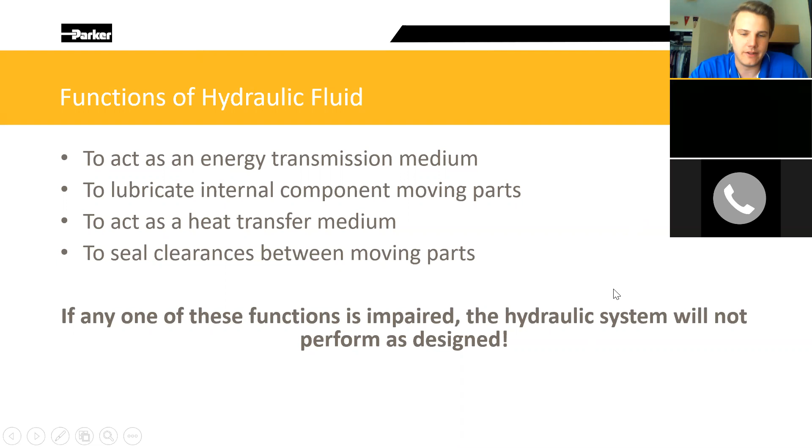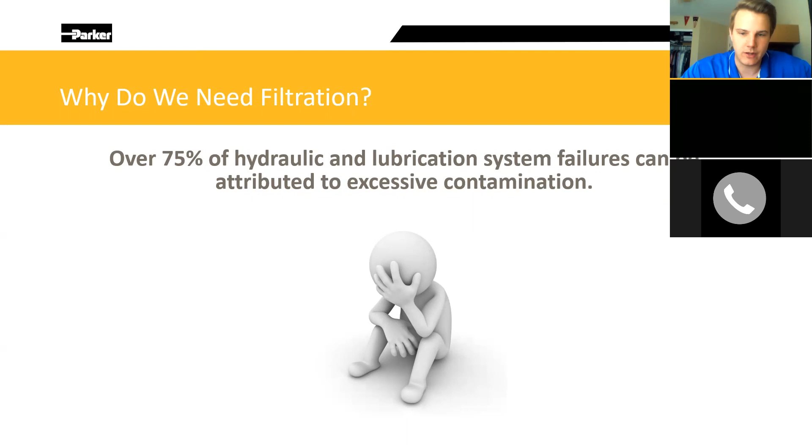So one of the main ways that these functions can be impaired is through contamination. Over 75% of hydraulic and lube system failures can be attributed to excessive contamination. That's over 3 out of every 4 problems you see with a hydraulic system that can be attributed to just contamination in the system. It doesn't have anything to do with the design of the system or the application it's being used for. It could be designed perfectly, but if you get contamination into the system, you're going to see failures and problems, and really have to deal with those headaches and issues.

So there are 3 main types of contamination you can get in a hydraulic system: the first being particulate, the second being water, and the third being air. Particulate is the most common contamination we'll see in a system. It's going to be in every system you see. It's really more about limiting the particulate and limiting the amount of large particles that are in your system.

Water is another common contamination, and it can cause some major problems. Air is something that's more on a specialty basis. It's not as common as the other two, but it's still worth keeping an eye out for, and you need to be aware of the different prevention methods and different issues it can cause.

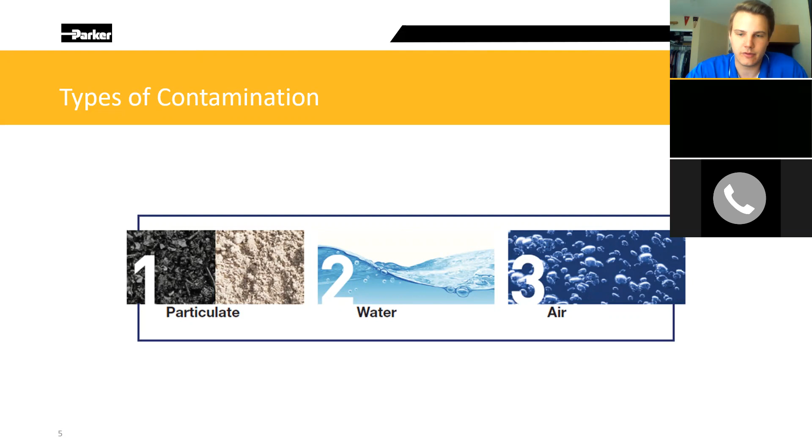So diving right in here to particulate contamination, one of the main sources of contamination is just built into the system. I know Air Hydropower does a lot of work building hoses and power units, and through that manufacturing process, you can get a lot of contamination in your system. You can have rubber particles from hoses and seals just from cutting the hoses to the correct lengths. You can have dust just from different components sitting around for a while before they get put into use. You can have welding slag and even sand from castings.

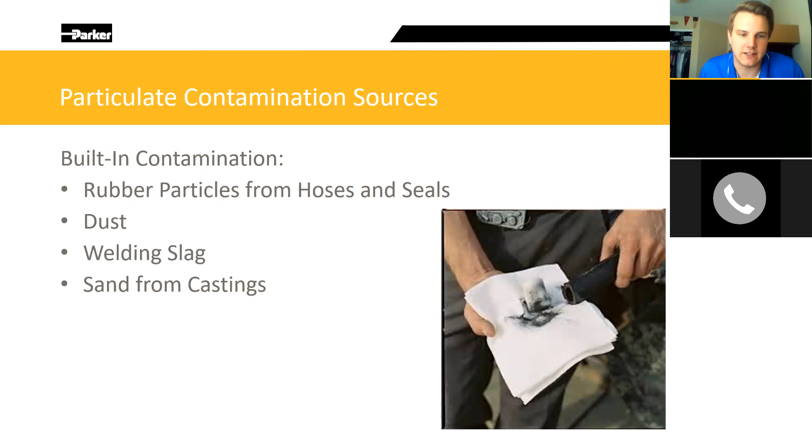Another contamination source is external to the hydraulic system and gets ingressed into it. Here you see ingression rates for typical systems in different environments. We've all been to different plants - some seem pretty clean, some are definitely not. But even in super clean assembly facilities, you can still have between 100,000 and 1 million large particles ingressing into the system every minute. So just because it looks clean doesn't mean there's no dirt - you're still getting particulate contamination into the system, and you need to be actively preventing it from ingressing.

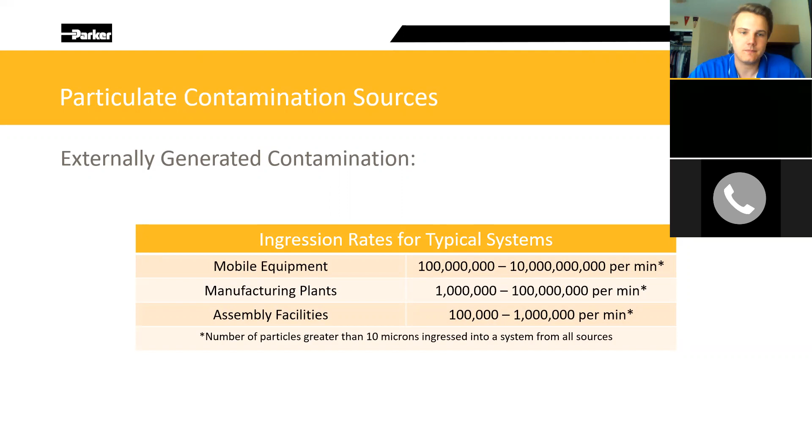We also have generated contamination - stuff that gets produced within the hydraulic system itself. To highlight a few main ones: abrasive wear is when existing particulate in the system runs through and scrapes and wears down different components. There's also fatigue wear - over time, pieces of the system are going to break apart. Nothing's going to be perfectly new for its entire life, so it's something to keep an eye out for.

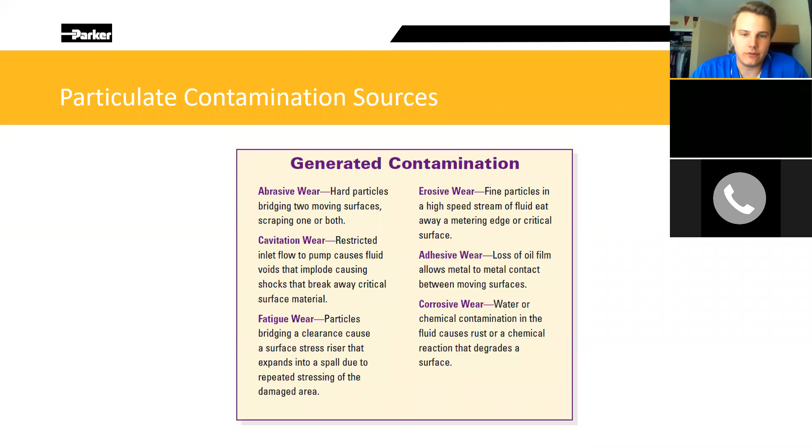And then there's also erosive wear - fine particulate in the system, once you get it up to pressure and flowing at high rates, can slowly eat away at the components. As you get more particulate, these wear mechanisms increase in rate. It's impossible to get zero particulate, but if you're able to limit the amount, you can really prevent these from building up over time.

There's also contamination from new fluid. I talked about this briefly in our last webinar, but any new fluid you get is not going to be clean. As you can see here, product B and product C in those visual examinations are dirty - there's a bunch of particulate in them. Compare that to our Parker's DuraClean fluid, which is packaged clean at ISO 15/14/12, clean enough for most current hydraulic systems. That's really a great starting point to be at.

But those other ones at 22/20/14 and 25/24/21 are definitely too dirty for any new or existing hydraulic system. If you were to just pour this oil from the bucket into the system, you're putting all that particulate in as well. Just a note - the color looks clean doesn't actually mean anything. Looking at those vials, you'd probably guess the middle one is cleanest just because it's the lightest color. But pretty much every manufacturer colors their oil to a shade they think the customer will see as clean - everyone adds their own special blend. It's not a good way to determine how clean your fluid is, so you really do need to pre-filter any fluid before putting it into your system.

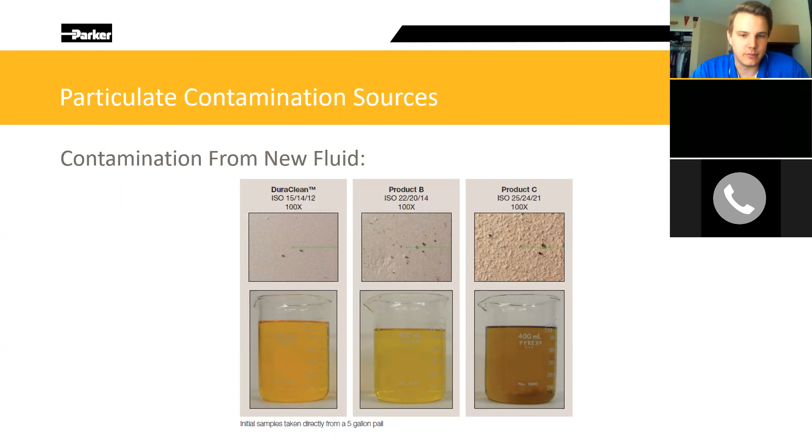Just some basics covered in the last webinar, but wanted to remind you. Different particulate sizes fall into two classes. We have silt, which are small particles less than 5 micrometers in size, and these generate system component failure over time. They're not something that causes problems as soon as they get in, but as they build up in the system, they can cause component failures.

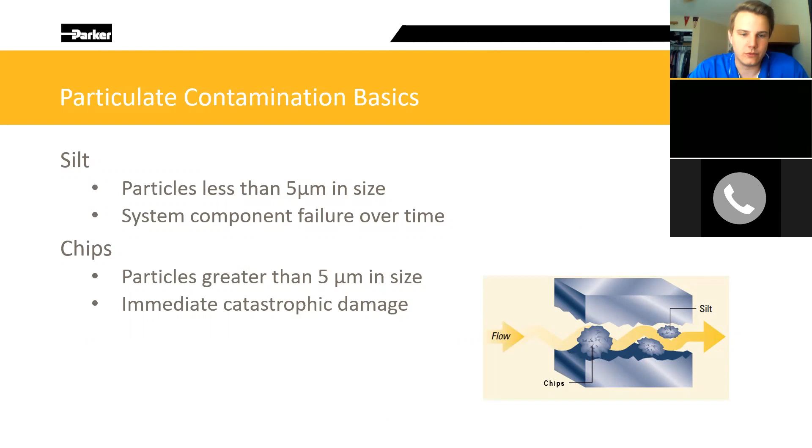We also have chips, which are particles greater than 5 microns in size. Those can cause immediate catastrophic damage - if you get those into your system, you can see immediate problems. It's definitely more of a problem, so you want to focus on keeping those out of your system and filtering them out when you can.

Some of the results you may see from particulate contamination: as soon as you get particulate contamination, your costs are going to start increasing, whether that's component replacement costs. Every time a component fails, you have to pay to replace it - that can build up over time from cheap pieces all the way up to high performance components that are costly every time you replace them. You also have increased overall maintenance costs - every time you have to do anything to the system, you have to pay someone to do it.

And the more dirty your fluid is, the more often you're going to have to have maintenance on the system, and that just builds up. You'll also have loss of production or downtime while you're doing that maintenance, so it just kind of compounds on itself.

And then if you do let the particulate contamination build up, you're going to have a lot more frequent fluid replacement. So it's not just buying the new fluid, but also the costly fluid disposal for the old fluid you're no longer using. That fluid disposal is really going to be 3 or 4 times as much as just buying the new fluid. It's a cost that people don't necessarily see right away, but it's definitely a major factor in lowering your costs when you keep your fluid clean.

Just a little fun fact: the function of a hydraulic filter is to clean the oil, but it's really to reduce all of these operating costs and prevent the end user from having these maintenance costs or loss of production. It really eases everyone's mind - they're paying to run the system, not wanting to pay to fix the system.

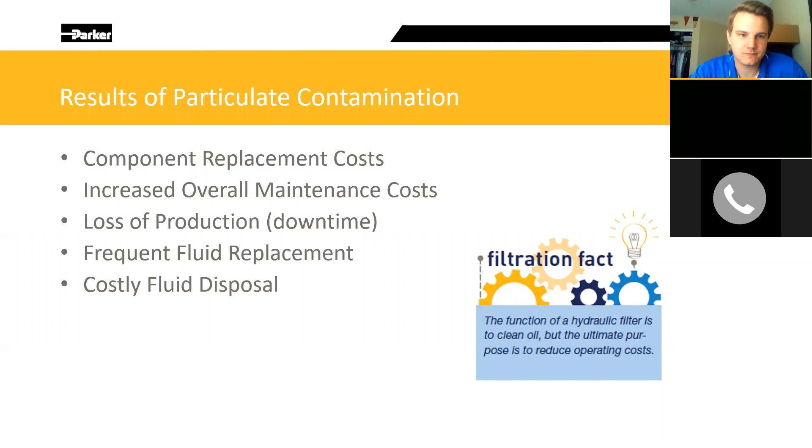So how can you tell if there is a particulate contamination problem? A lot of warning signals can be seen, whether you have valve spool decentering, leakage, or chattering. You can have pump failure, loss of flow, or frequent replacement. You can have cylinder leakage and scoring, or servo hysteresis. All of these, pretty much every time you see them, are going to be particulate contamination based.

So if you see any of these, it's a great way to start the conversation with the customer about dealing with the particulate contamination problem and getting it fixed right away.

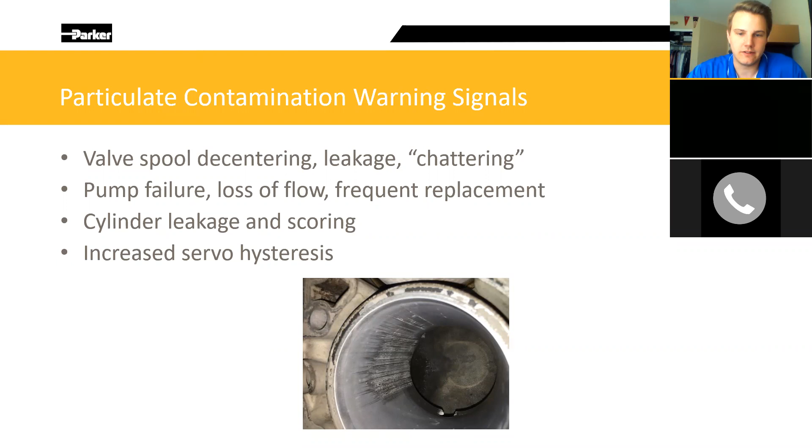As far as particulate contamination detection goes, if you see some of those warning signs and really want to show that, yes, particulate contamination is a problem in the system, Parker does offer a bunch of particle detectors and monitors to really pinpoint exactly what the contamination level is.

We also have the bottle sampling PAR test, which is something you can take a sample from the system and mail it out to a lab, and they'll go through and give you a complete diagnostic - here's the particulate you're seeing, here's pretty much everything you need to know about the oil. That's a great conversation starter you could use for a customer as well.

As far as prevention methods go, these are really the easy, inexpensive ways to keep a system running at its top level as long as possible.

So if you utilize reservoir air breathers, you can flush systems before initial startup. Like I said, keeping that built-in contamination to a minimum - you can kind of get it all out of the system before you bring it up to pressure.

You can specify rod wipers and replace worn actuator seals. Anytime a cylinder extends, it's exposed to the environment, and then when it retracts, it's bringing all that particulate back into the system. So keeping those seals and rod wipers in good condition and making sure they're in place can prevent a lot of that particulate from getting into the system.

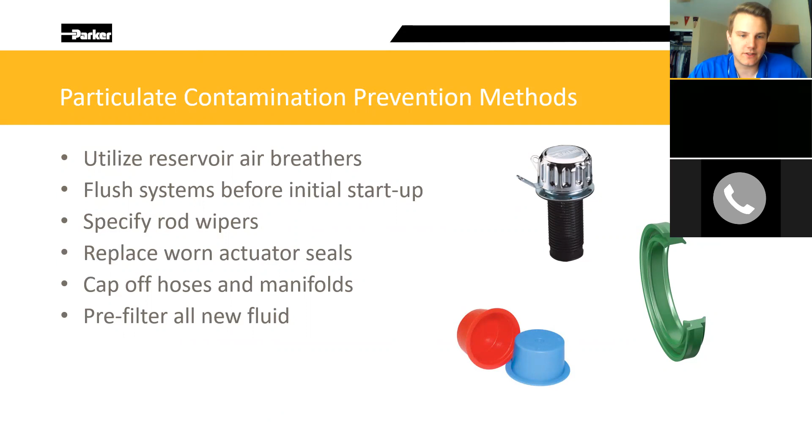And you can also pre-filter all of your new fluid. Like I said, most new fluids are dirty - they're going to have particulate in it. So anytime you introduce new oil into a system, you're introducing new particulate. If you're able to pre-filter it before you dump it into your system, you'll see a lot less particulate contamination.

Moving on to some of the water contamination, a lot of the sources are similar to particulate. So if you have worn actuator seals, it can again bring in that contamination from the outside environment.

A reservoir opening leakage, as you can see in the picture on the right - if water's pooled up on top of your reservoir, it can get into any openings that may be on top, for your breathers or openings in the reservoir, and that can contaminate your system.

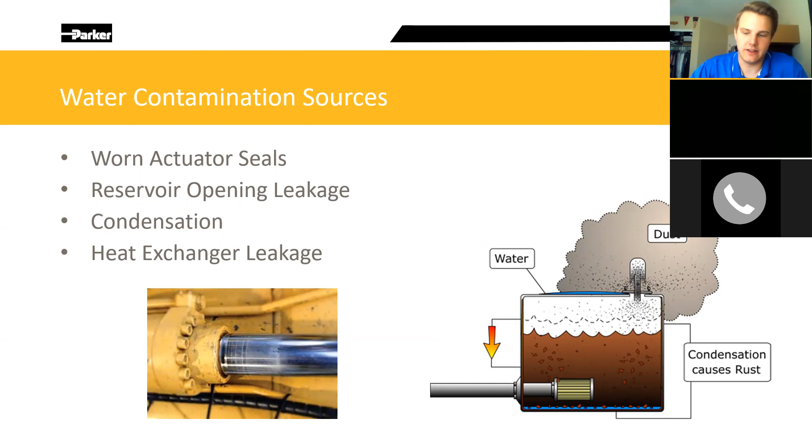You can get condensation within your system, and you can also have heat exchanger leakage. If you're using a heat exchanger to cool down your oil, those can develop leaks, and that water can just dump into your system.

So some basics you need to know about water contamination. There are two main types: dissolved water and free water.

Dissolved water is when the water content is below the oil's saturation point and you visually can't see the mixture. A good comparison is how you can dissolve salt into water - it just disappears and you can't see it.

The same thing happens with water and oil. There's a certain point at which the oil can dissolve all of the water, but once you get past that point, you'll start to see free water. That's when the water content is above the saturation point of the oil, and it will generally separate into a separate layer over time.

This example in the picture at the bottom right shows what it looks like when it's in the system - it's all mixed up and gives that cloudy appearance. But if you were to let that sit and settle, you would definitely see two distinct layers of oil and water.

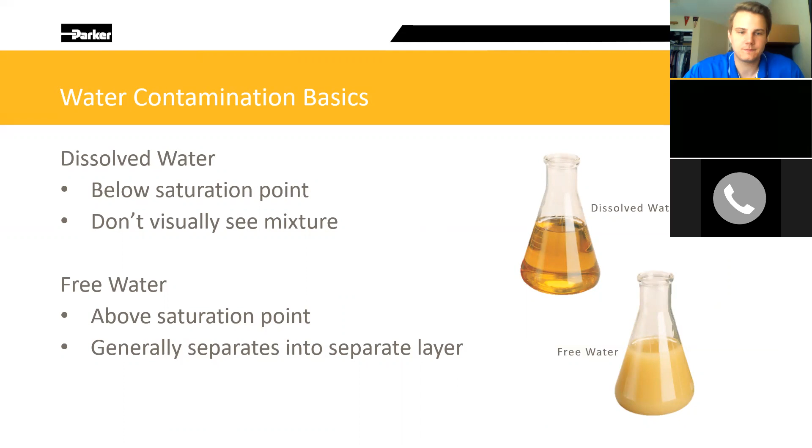So what happens when you get water contamination into your system? Some of the main things you may see are corrosion of metal surfaces, accelerated abrasive wear, bearing fatigue, the fluid additive in the hydraulic fluid breaking down, a viscosity variance, and an increase in electrical conductivity.

None of these are things you want to see in your system. The oil was designed to have certain properties that work well within a hydraulic system, so anytime you change those properties or introduce water and mess with it, you're definitely going to see lower performance.

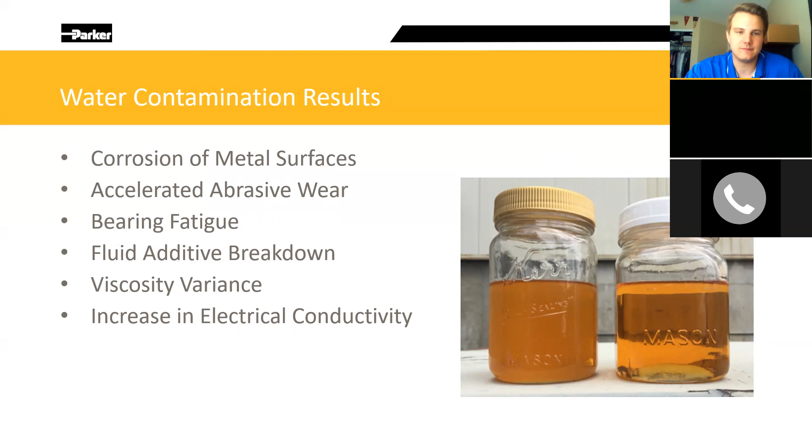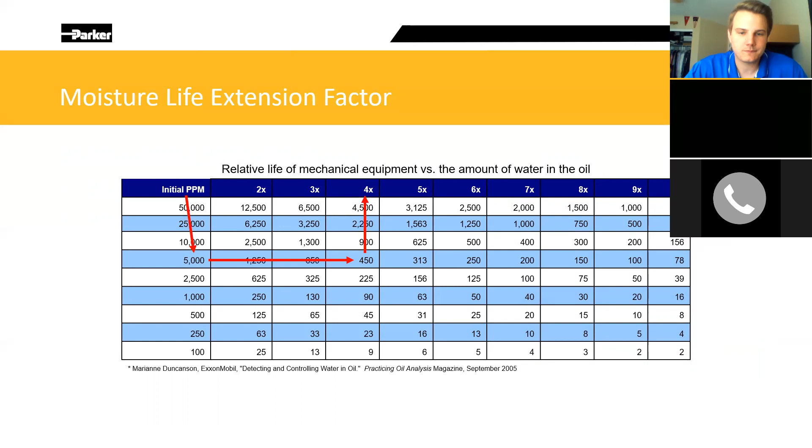So how do you detect water? One of the main ways, the easy and inexpensive way, is just visually. If you take a sample from your system and you can see that cloudy appearance, or if you let the system sit for a while and you can see the water oil separation, that's the best way to know that you have a water problem.

Beyond that, we do have moisture sensors, and our particle detectors - actually some of them do have water content options, if you really care about exactly what you're seeing and you want to pinpoint that to a certain level. As well as with the particulate detection, the PAR test kit will give you a water content level as well. So that's another way you could get this information.

So some of the prevention methods - again, these are kind of best practices - keep the water out of the system so you don't have to make any expensive repairs or expensive fixes to the system.

One of the best ways is to utilize a desiccant air breather. Rather than just keeping a particulate air breather on there, this can get particulate and water. So any water in the outside air will be absorbed by this media before it enters your system.

Again, you can flush all your systems before initial startup - you're not really sure what has been pulled up in your system while you were manufacturing it. You can also specify rod wipers and replace worn actuator seals for the same reasons as particulate. You just want to keep all that outside contamination on the outside of your system.

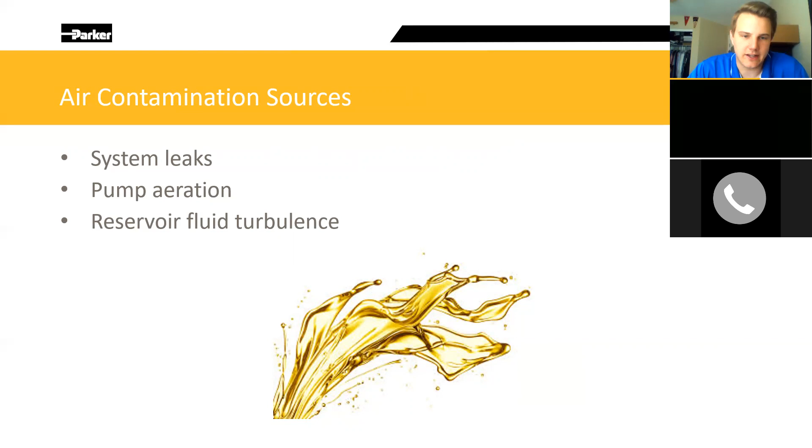Moving into air contamination, some of the main sources can be system leaks, pump aeration, and reservoir fluid turbulence. That reservoir fluid turbulence can basically be described as just splashing of the oil in your reservoir, which can mix in some air with your oil and cause some bubbles and foaming problems.

The main one you need to worry about here is the entrained air. That's what gets into your system and what can cause the most problems. The foam will usually just sit on top of the surface of the fluid in the reservoir. It can cause some problems if it builds up and overflows or actually does get into the system - it can be problematic as well. Free air can usually just be removed from your system by venting the system, and if you follow normal manufacturing and filling procedures, it's not going to be a problem in most cases.

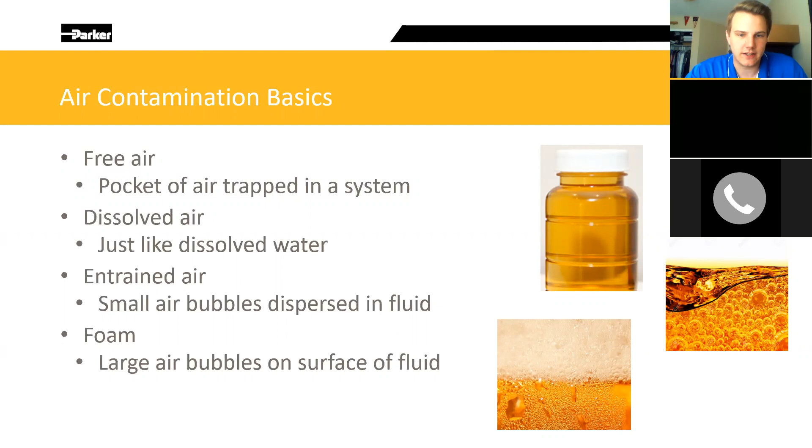So what can you see from having air contamination in your hydraulic system? Some of the main ones, you can see a loss of transmitted power. Anytime you bring pressure up to the system, those air bubbles are all compressible, well the fluid is not. So if you bring it up to pressure, what you're actually doing is compressing those air bubbles before you can do any work. That really just decreases your amount of transmitted power. You're not going to see the results that you designed the system for, and you're not going to be happy with the performance. You can also see a reduced pump output.

There can be a loss of lubrication. Again, introducing air into the oil changes the oil properties - it's not going to be working as it was designed to. You can see an increased operating temperature. That air is getting compressed, and when you do that, it raises the temperature of that air, which can manifest itself into a higher operating temperature. Again, the reservoir fluid foaming can build up over time, and there may also be some chemical reactions that you could see, which definitely would change the composition of that hydraulic fluid.

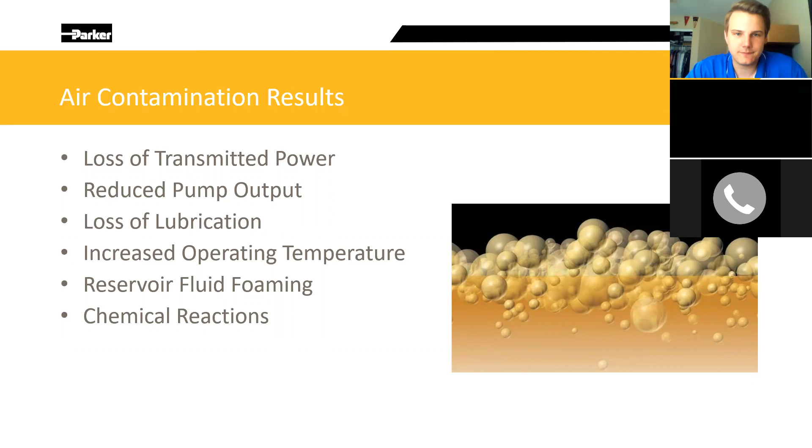So how do you detect air contamination in your hydraulic fluid? The best way is just to do it visually. Some of the particle detectors and condition monitoring options we have can give you an error that looks similar to excessive water contamination, which can be a way to diagnose it, but really the most effective way is just to look for that foaming, look for those bubbles within the system. And if you have any problems or any applications that you think may be attributed to air contamination, you can always reach out to me or Colin Francis or Nick Grover to help you out with that.

So again, the prevention methods, which are the most important part to keep the air contamination out of your system. You can utilize system air bleeds to get rid of that free air like I was talking about - you really don't want to have any of those pockets of air in your hydraulic system. Use a flooded suction pump, that'll decrease the amount of pump aeration that's possible.

So at first you'll see the turbulent design. When the oil starts flowing, you can tell it's going to splash a lot when it falls down into the oil. But here you have the better way of designing it. You can see the fluid is just nicely, easily pouring down the side of this diffuser right into the oil. There's no splashing. It's not going to aerate your system at all.

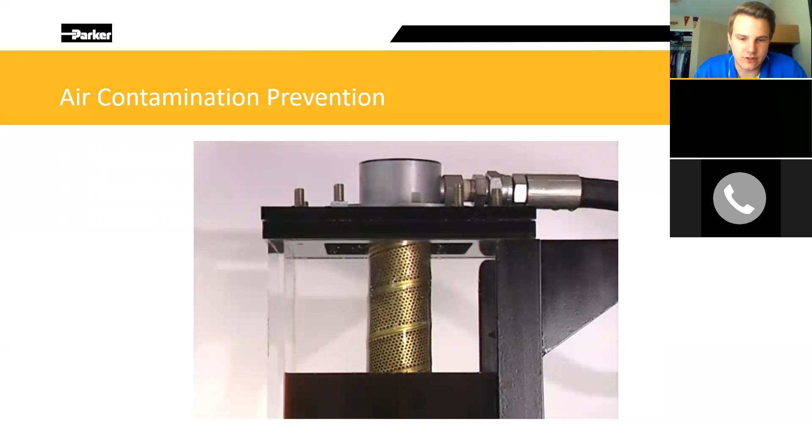And here's just a close-up view of that. You can see there's very little splashing, but the oil is flowing down the side of that diffuser and just settling nice and easy into your reservoir.

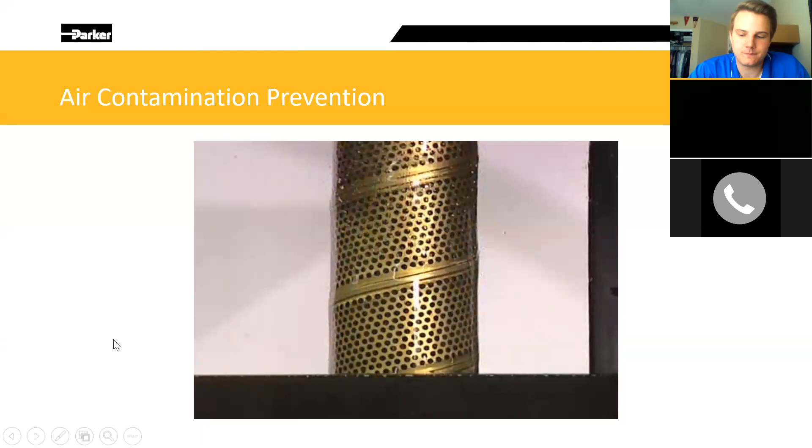So to move into some of our therapeutic products, like I went over in our last webinar, the Hydraulic and Fuel Filtration Division likes to focus on total system health management. We went through some of the diagnostic options for these different types of contamination. If you're able to diagnose the system and find out what's wrong, we offer therapeutic products that can fix the problem and get you back to healthy operation. Once you utilize those to get the system running smoothly again, you need preventative methods to keep that long-term value and keep the contamination problem from happening again.

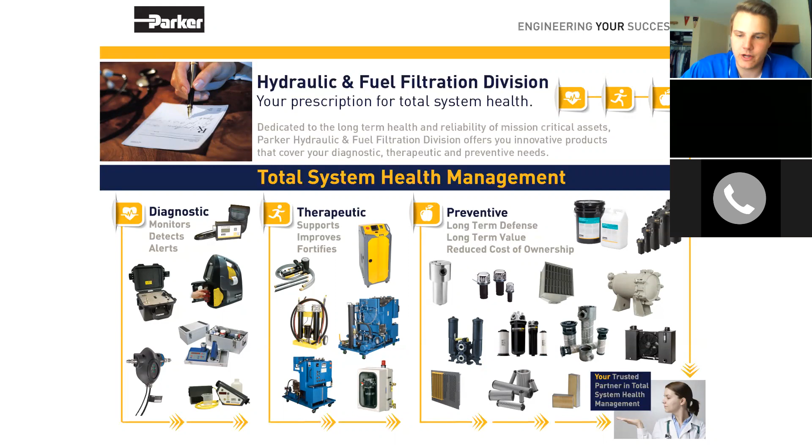So for particulate removal, we have the filter cart. It's great for reservoir polishing or fluid transfer. It uses a two-stage filtration, and there are IntelliCart upgrade options available, where you have the particle detector hooked into that filter cart so you can really see what your particulate contamination level is like.

It's also a great application for Pargel, which is our water removal media. Since it's a low flow application, that Pargel can get a lot of that free water out of your system just by sticking the hoses in your reservoir and filtering it through the cart.

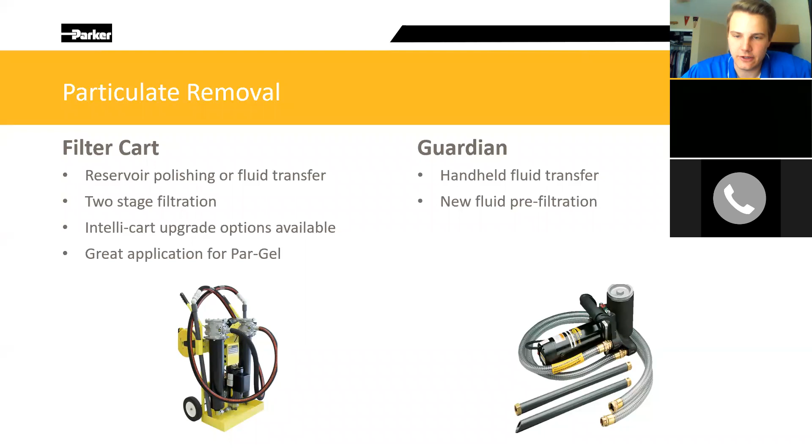We also have the Guardian unit, which is a handheld fluid transfer product. It's great for new fluid pre-filtration. You can put one hose down in your drum of oil and the other hose into your reservoir, and it'll pre-filter that fluid. It's a nice lightweight option to move around and carry with you as you're filling up your hydraulic reservoirs.

On top of those, we also have some 3-in-1 contamination removal products that get rid of water, particulate, and air contamination. Our first here is the PVS series, which uses vacuum dehydration technology to get rid of water contamination. It's a portable unit, so you can take it from reservoir to reservoir, hydraulic system to hydraulic system as needed, and it really cleans up those systems, getting rid of all the free water and most of the dissolved water within your system.

We also have the Sentinel, which also uses vacuum dehydration technology. It's a system controlled with IQAN, and it's more intended to be an unattended, automated batch process. You just hook your system up, set your parameters for the contamination level you want to keep under, and it'll run itself and keep you below those levels.

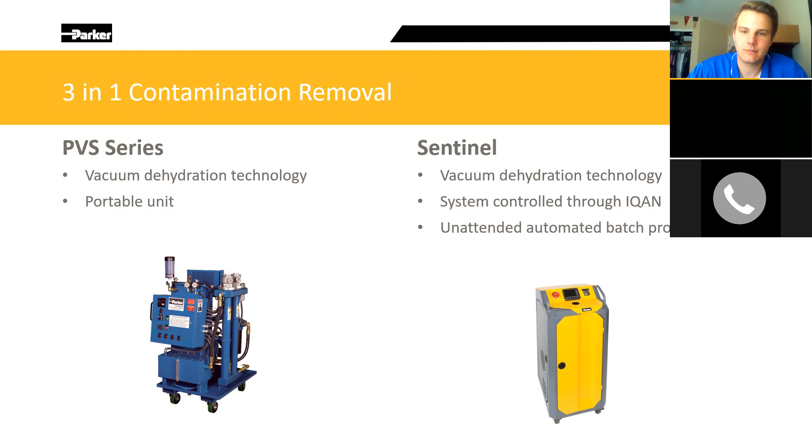All right, so that's everything I've had here today. Do you guys have any questions about anything I went through, particulate, water, or air contamination?